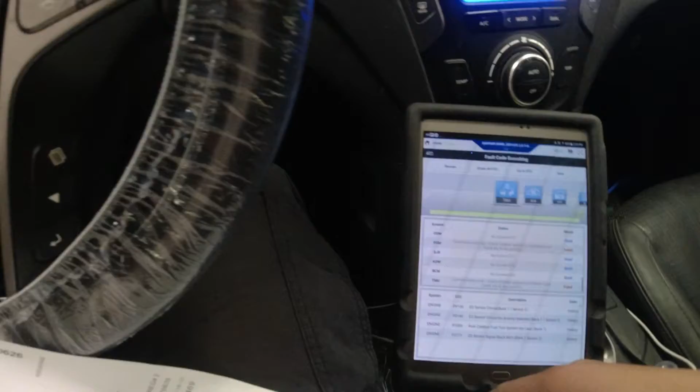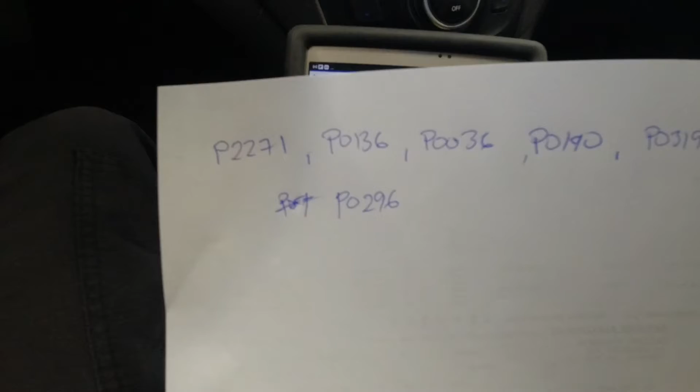So today we got a 2014 Santa Fe. It's a 2 liter, 535 kilometers. Customer complained about check engine light. The history of this vehicle, they replaced the sensor, and I jot down our codes before: P2271, P0136, and I scan it, and they're the same. We have the same code.

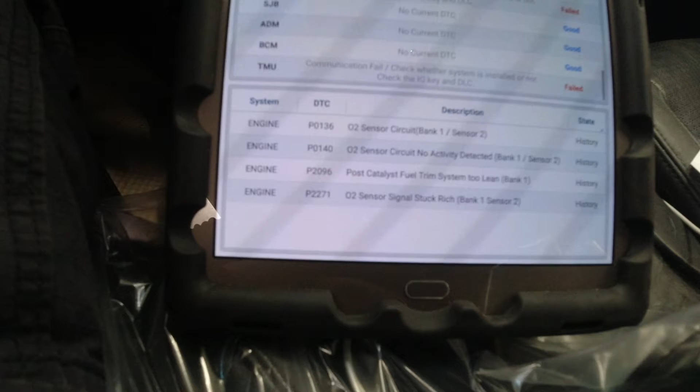So I went to the history for what part they replaced, and they replaced the bank 1 sensor 1. So I'm gonna double check if they really replaced the bank 1 sensor 1 or they replaced the bank 1 sensor 2, meaning the downstream, because as per this code right now it's pertaining to our bank 1 sensor 2, the downstream. What's the other history? Okay, that's the only history we have.

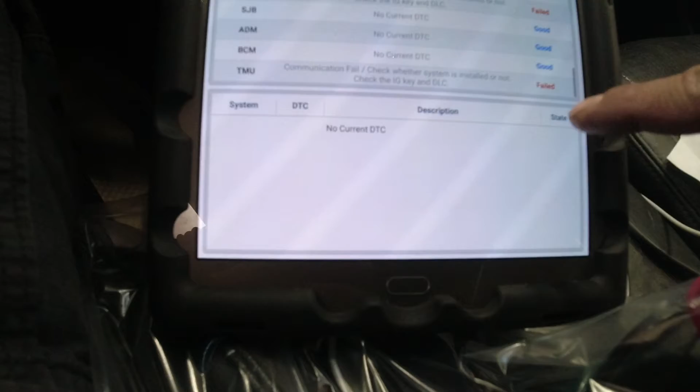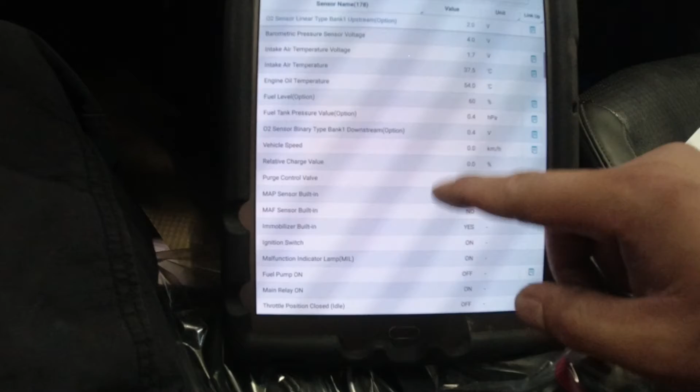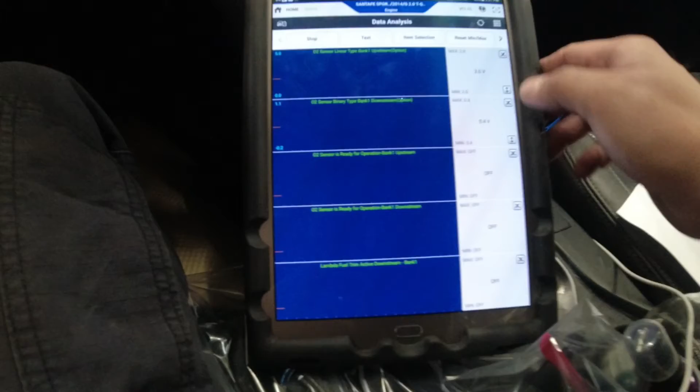So you can go to our data, and let's see what's going on with this reading, because it's saying stuck lean or stuck rich, and there's no activity on it, right? So we got here upstream, downstream. What else do we have? We'll check this O2 sensor ready for operation. Okay, so we're gonna start this. Let's go graph. So right now we're just waiting for it because the engine is cold right now.

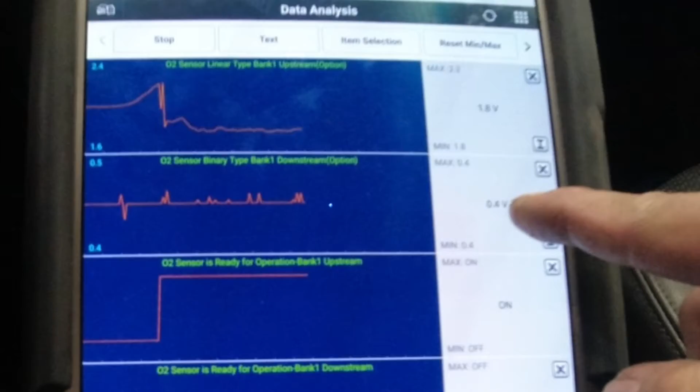Okay, so bank 1 sensor 1, the upstream, right now it's showing on. But our downstream right now is staying at 0.4 volts. So we'll just wait until we're at operating temperature, and because of those codes I can also smell the rich condition. As per the code, they're saying that it's stuck rich on the downstream sensor. So it could be injecting more fuel, because we have also a stuck lean code.

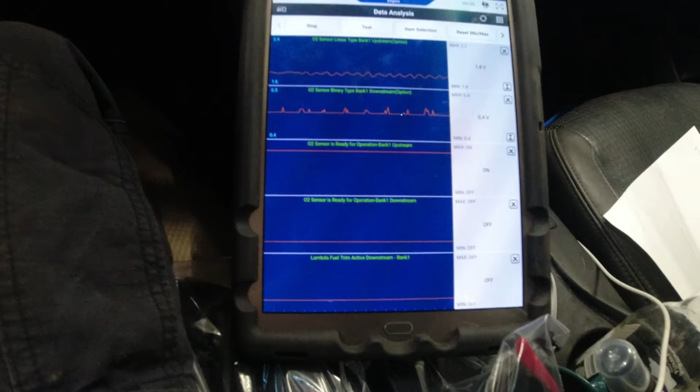So I'm just gonna let it run for now, and see if our downstream, as per the computer, wants to turn on or is ready for operation. Let's see this data here, if it's turning on or not, and then we can do some snap throttle and see the response on our O2 sensor readings. Okay, so I'm just playing around with the throttle. At least it will help the operating temperature go up. So right now we're at 87 degrees. Our downstream operation turns on, and as I can see here on our voltage reading, it's staying at 0.4, right?

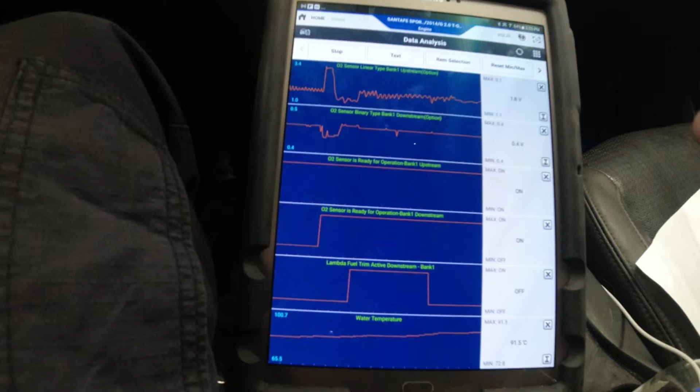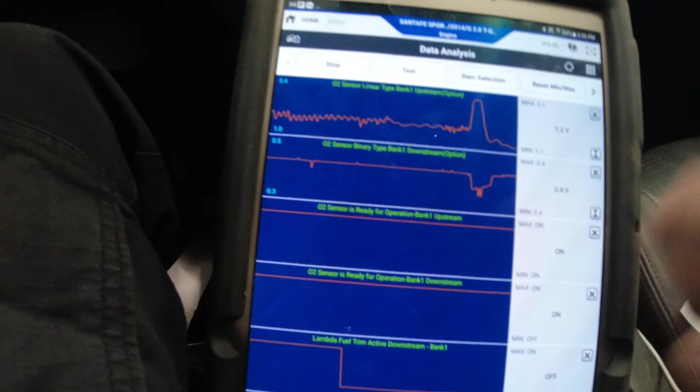So right now I'm revving the engine at least 2000 rpm, but once you let go of that pedal, those sensors should go lean, right? Because it's cutting off fuel. So right now I'm gonna raise it. Once I take off the gas pedal, as you can see here on our upstream, which is reading correctly, it goes up because there's fuel cut off. But our reading on this downstream is staying at 0.4. Maybe this is just a substitute value.

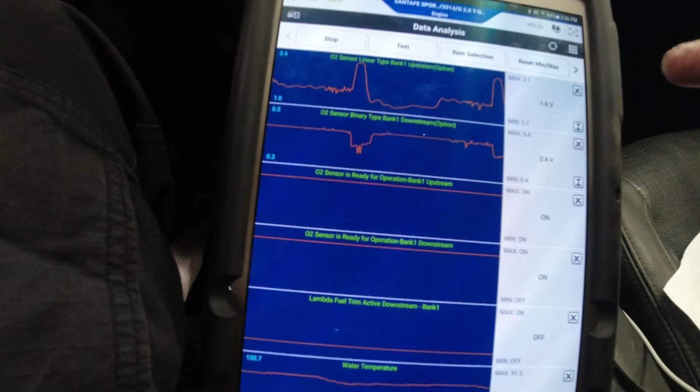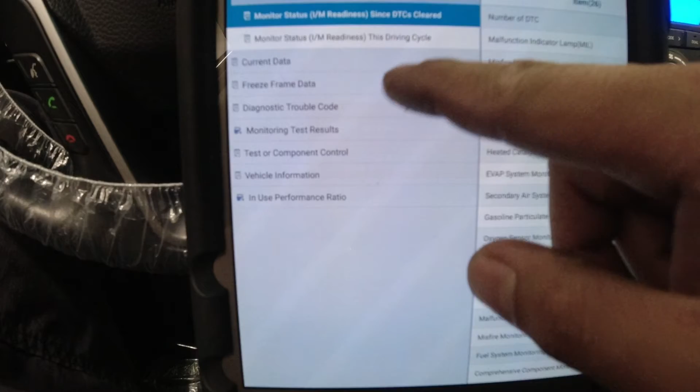So what we can do too is go to the OBD2 side, and let's see what's the reading in there. Yeah, so it's just staying at 0.4. So let's go back to the main menu. I'm gonna go to the OBD2. Okay, so I'm gonna go first to the diagnostic trouble codes. Okay, so all codes are pertaining to our bank 1 sensor 2 downstream and saying that it's lean, right? So now I can go to our current data,

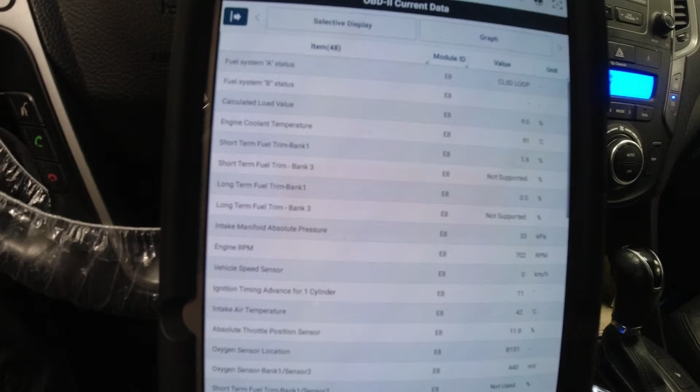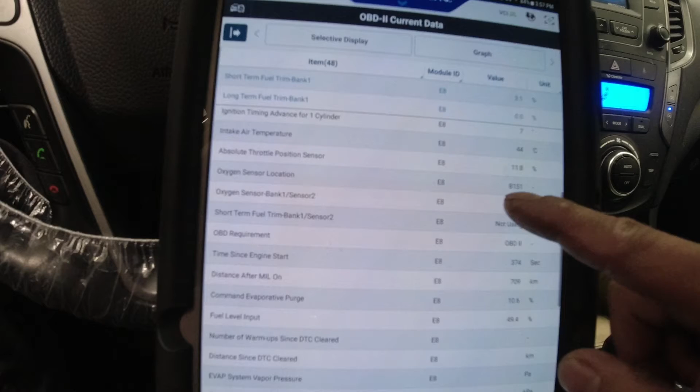because on most of these newer cars, let's say this Santa Fe, the downstream is also a fuel trim input. So let's go here. I'm just gonna check our short term, long term, our bank 1 sensor 2 downstream, and then our bank 1 sensor 1, which is the upstream. I'm just gonna graph that. Okay, so now I'm just gonna raise the RPM.

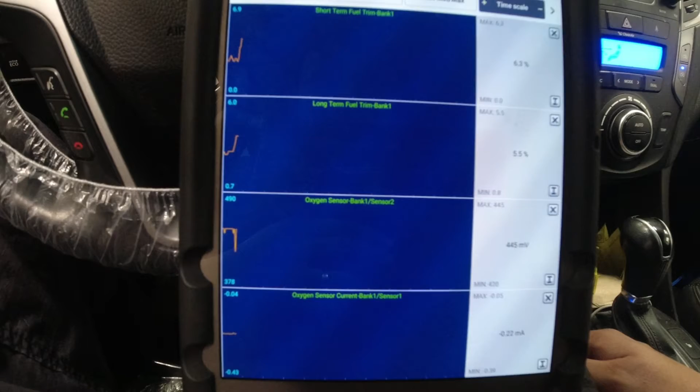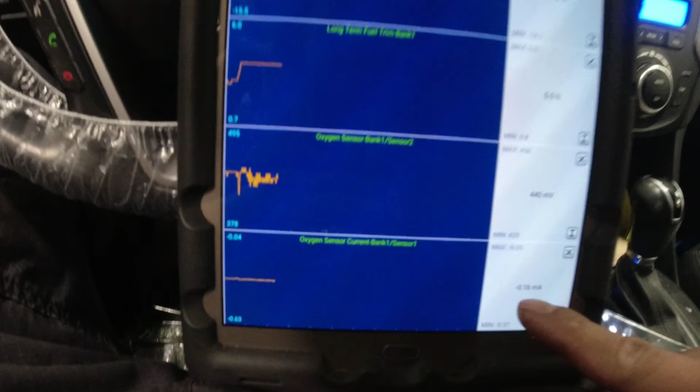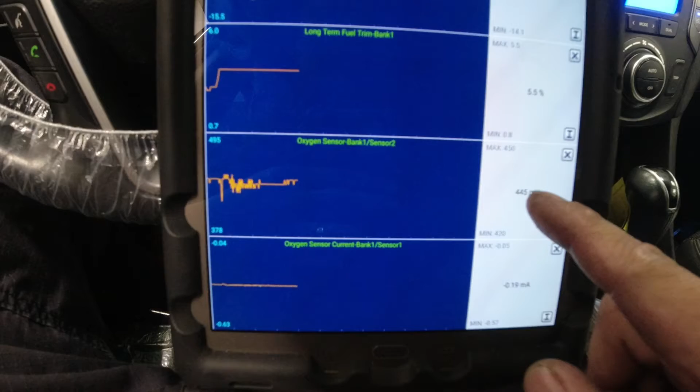So right now, when raising the RPM, my downstream should at least read 0.8, 0.7 volts, right? Or 0.9, because we're putting more fuel in there. But there's nothing at all there. It's staying at 440 millivolts. But our upstream is showing minus 0.35 milliamps. So that's the rich side of the lambda sensors, right? So if I let this go, I should expect this milliamp reading to go up and our millivolts to go down, because that's the lean side.

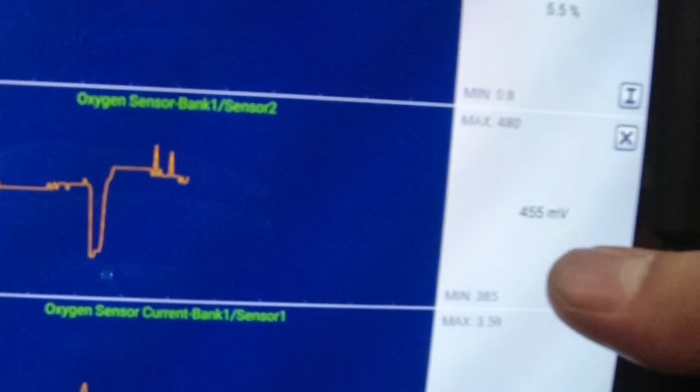So as you can see there, it went up, but it went down only 10 millivolts. As you can see here, it just went down, not all the way to zero, because that should go down all the way to zero. I'm gonna try that again. Raise the RPM. Stuck at 455 millivolts. Now if I let it go, that should go to zero. It's stuck at 380, right?

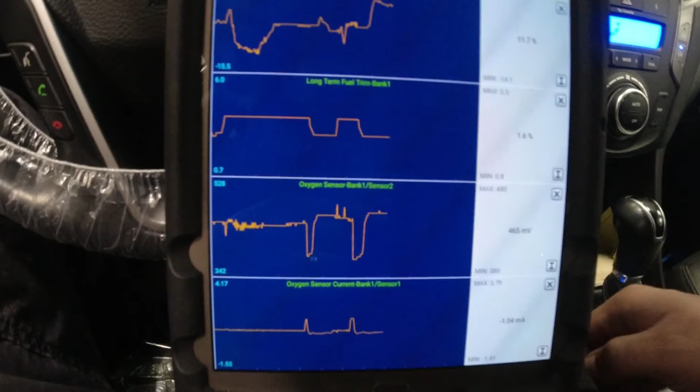So now the question here is, do we have a faulty sensor? Is our scan tool reading it correctly, right? So we're gonna go to the downstream sensor and check our circuit. I don't know if I can open the schematic diagram here. Let's see. I guess we can open it. We'll just eliminate some stuff before we go down that route. Okay, oxygen sensor, no oxygen sensor there.

There. Okay, so we have oxygen sensor here. So as you can see right now, we got our upstream oxygen sensor. We got power here, sensor 1, 15 amp, and they share the same power on our downstream. So I don't think that we have a problem with the power to cause that no activity issue on this sensor downstream, because that sensor will power up this upstream.

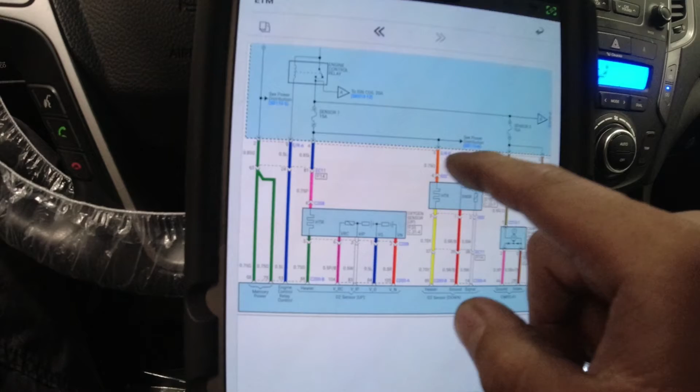But still, we're gonna double check this connector here. Maybe there's a broken wire in between here, this pin 5 and pin 4 going to our sensor itself. We'll check that, and then what else? We can check our control for the heater, if the PCM is controlling that, because if the PCM is not controlling that, let's say there's a broken wire, the heater will not work and we get a problem with our sensor not reading correctly.

So we're gonna double check those, and this is our signal, and compare, see if it's really reading that 450 millivolts, right? If our scan tool is reading correctly. So I'm gonna lift up the vehicle and let's just do visual inspection. Make sure that there's no leak also on that exhaust side, especially where the sensor sits, right? And then we're gonna hook up our test leads and then we'll monitor the readings.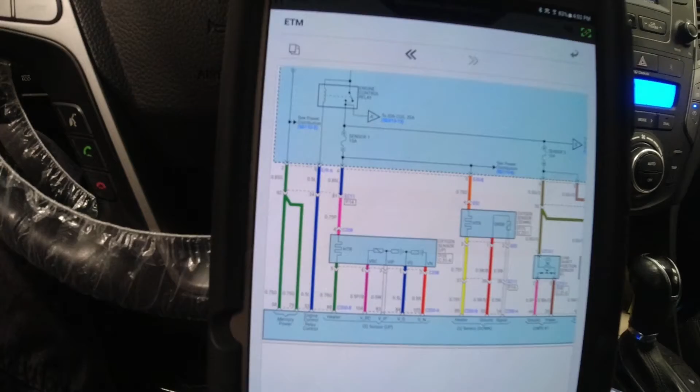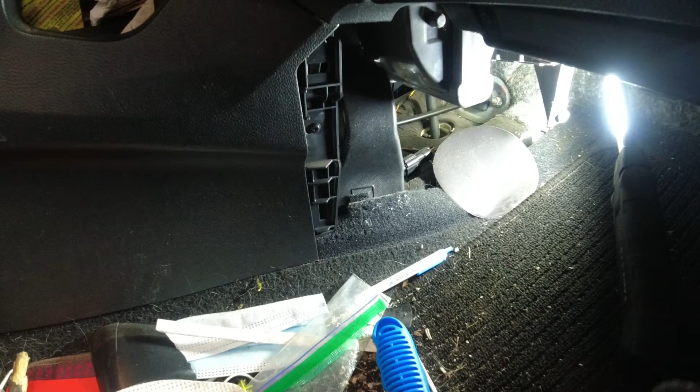Okay, so as you can see, there's some garbage there. Oh my goodness. I think the connector location is in here. So we're just gonna pull that out. Just trim piece. We put the light in. Okay, so our connector that we need to do some testing is this guy here. So let me remove that clip there so that I can just pull that whole connector there.

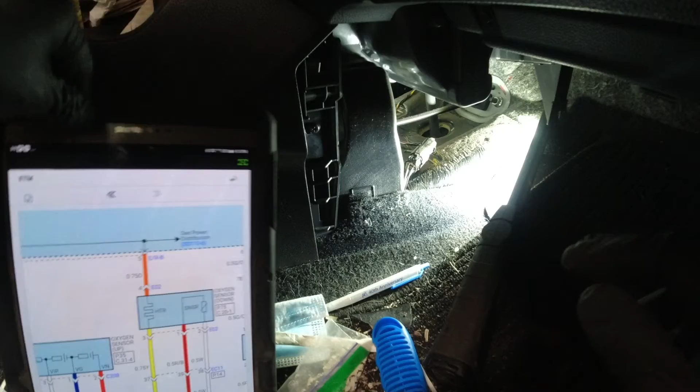Okay, so where's my scan tool? Let's confirm our wire colors. So here in my wiring diagram, as you can see there, there's orange, that's our power feed, our ground control for that heater, yellow, red, black, and white. So on this side here, I can see that we got orange, yellow, red, black, and white, right? So first we're gonna do the test and make sure that there's power going in.

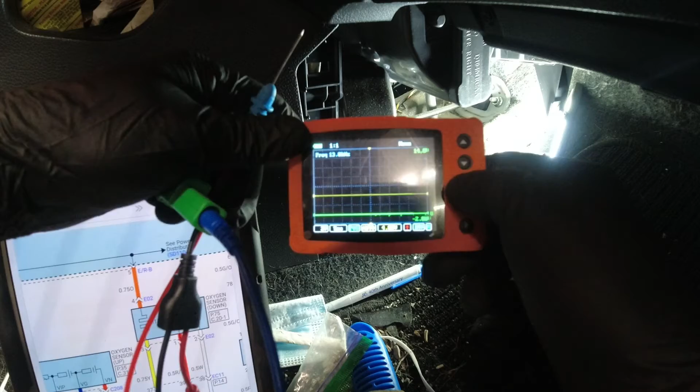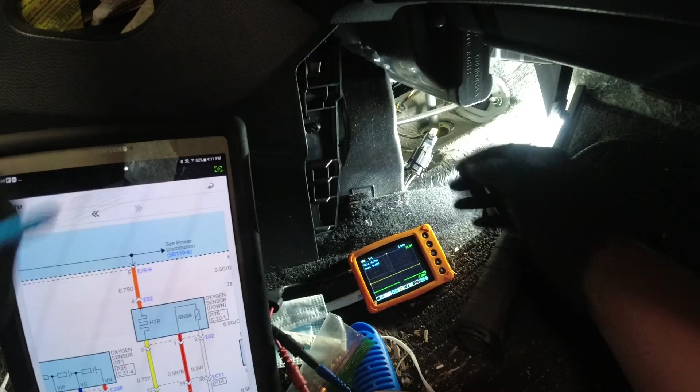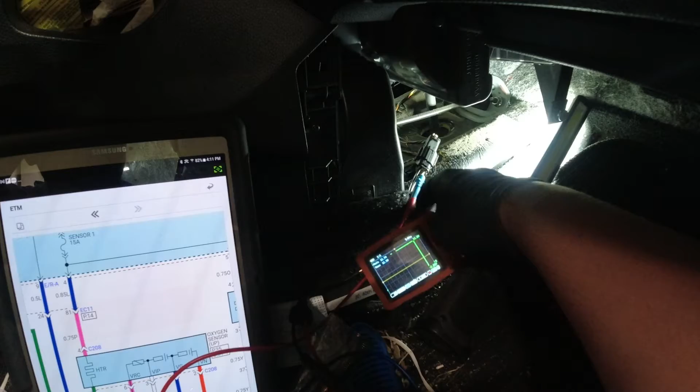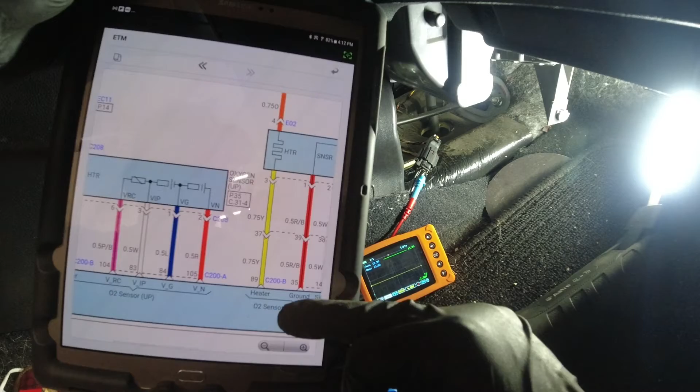Now, just to confirm with the heater side, if I'm gonna move our lead to our yellow one, ignition on, I should still see 12 volts, right? Until the computer grounds it, that's the time we get that ground control. But from here, fuse 12 volts, and it should pass 12 volts, right? At least we can see if we have an open circuit on our heater.

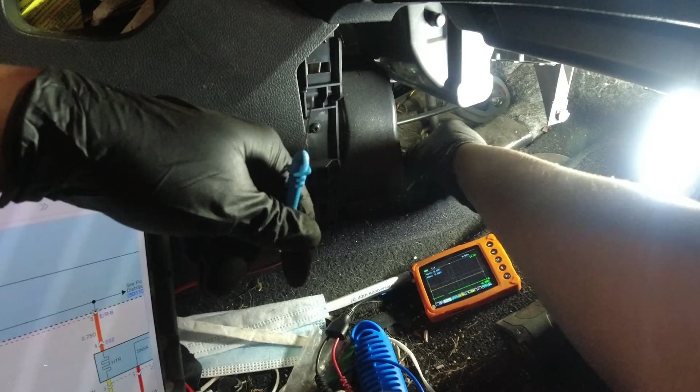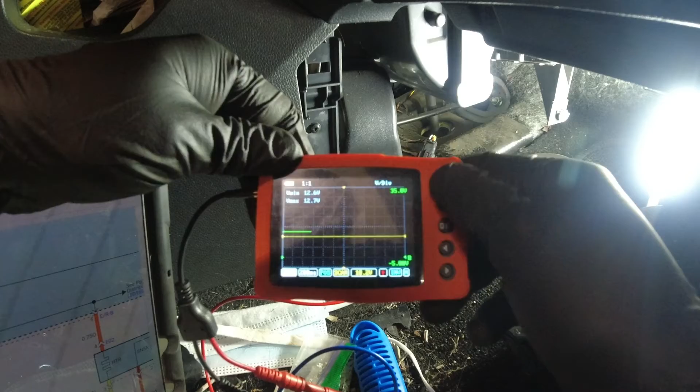So that's gonna be yellow. I'm gonna just take out that lead, and then that's the other side of the wire, the white one. Okay, so in there I still have 12 volts, right? You can see my line there, it went up. Yeah, 12 volts. Okay, so now next is, do we have a ground control? Does the PCM have the ability to make that heater circuit work? So I'm gonna leave that pin there.

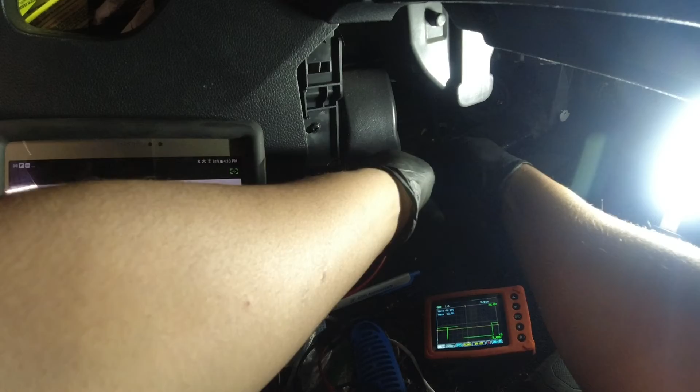Okay, now once I start the car, this signal will go down and it's gonna make that waveform like a signal ground, right? So let me start the vehicle first.

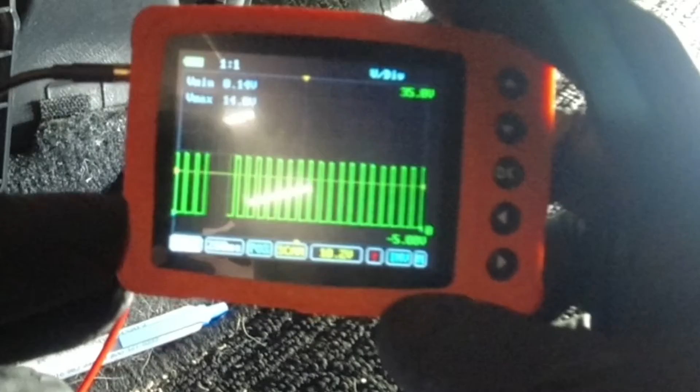Okay, so as you can see there, our PCM has that ability to ground that circuit, right? I can see it's pulling to the ground until the time that it's warmed up. That's the time it doesn't want to do it, to turn it off. But it's always there to maintain that temperature so that the O2 sensor will read accurately, right? So next we're gonna go to our signal.

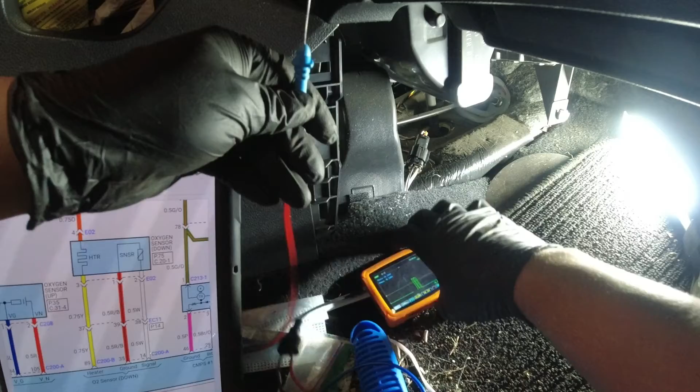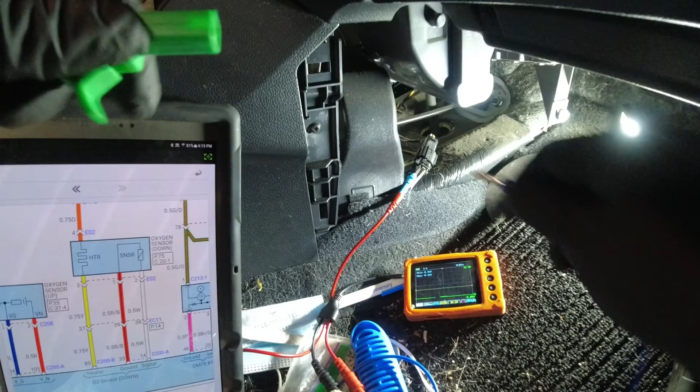The white one, and let's see if we have the same voltage there, 400 millivolts. That's what the scan tool said. White one, that's on the top. Okay, so on the top, I think I have to use a sensor ground on this one. So, sensor ground. Okay, let me adjust this guy here.

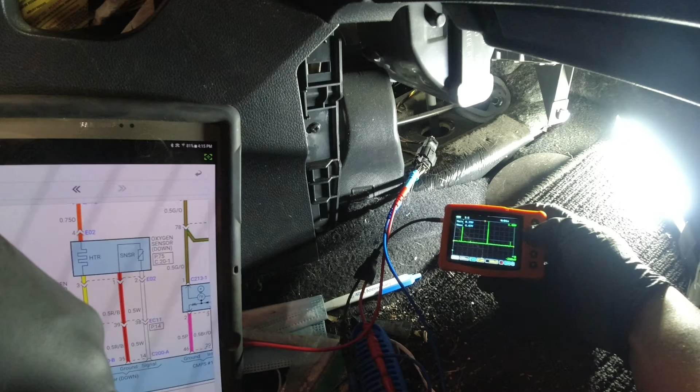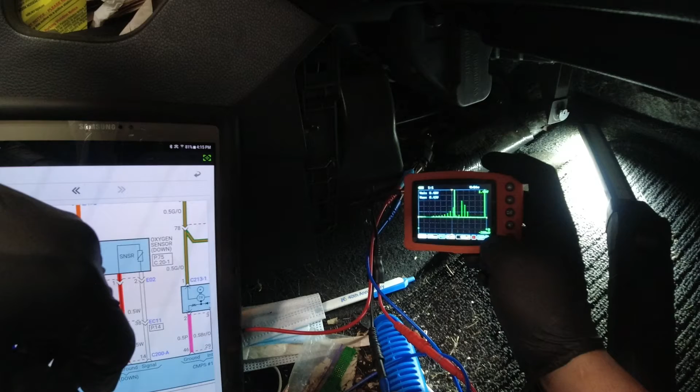Okay, so as per this reading, is it my connection? Why is it moving around? So right now there's some spike there, right? But the minimum reading there is 0.39 volts and the maximum is 4.4 volts, is that good? Let me do some snap throttle and see if that's gonna change.

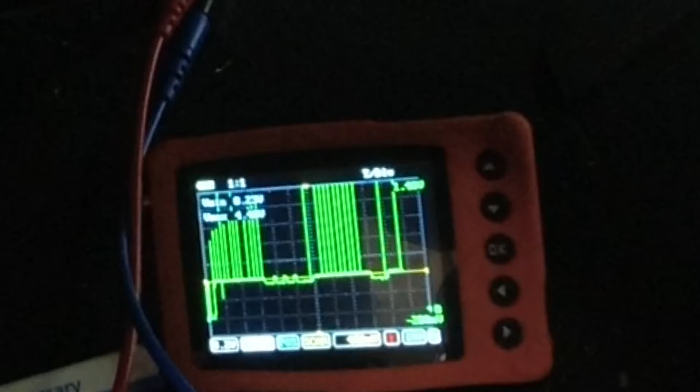Okay, it doesn't do anything at all. It's just a spike there, but this guy here, once we were doing something. So let me just raise the RPM and see. That should go lean. Little gas and that should go lean. And that small one down there, where's that guy? Oh.

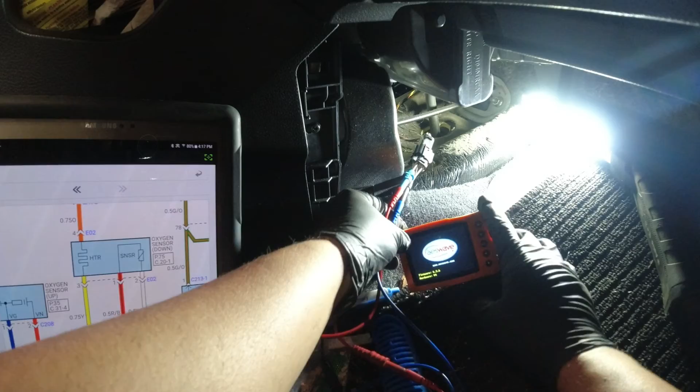There's no reading there now. Okay. Why is there no more reading there? Did I do something wrong? I just reset that quick. Meter. Voltage max.

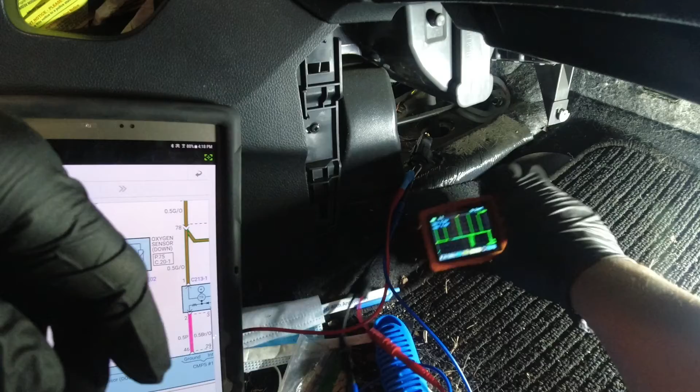Okay, so right now I think the scope is seeing something here. This is my measurement here. That line is reading 430 millivolts, right? The same thing as our scan tool, but since our scope is very fast in reading, that's why it's reading that spike and going down. But at least if I do some snap throttle, we should have some activity there.

You can see there it just dropped, and now it dropped all the way down. It dropped again all the way down. Can we see that it's stuck lean? It looks like it's stuck lean now. So if I move this cursor, let's measure that reading there. That side is 56 millivolts, so almost zero. So that's why we have a code for stuck lean, right?

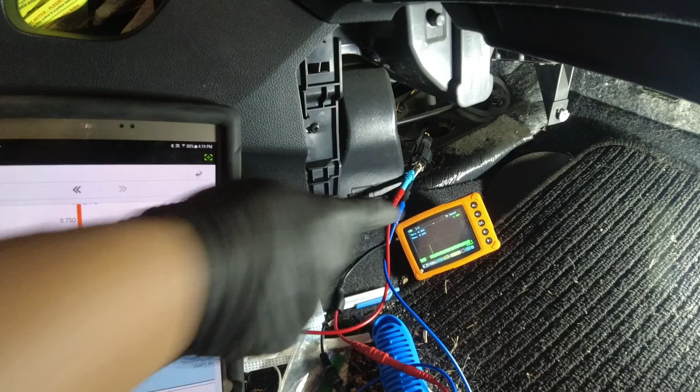Sometimes stuck rich, but right now it should not be reading like that if the sensor is working, because we're at idle, right? And during our visual inspection we could not find any leaks. So okay, right now I can say that we have a faulty sensor. Now I'm just gonna go back to our heater side, the yellow one. I'm just gonna make sure that we still have control there.

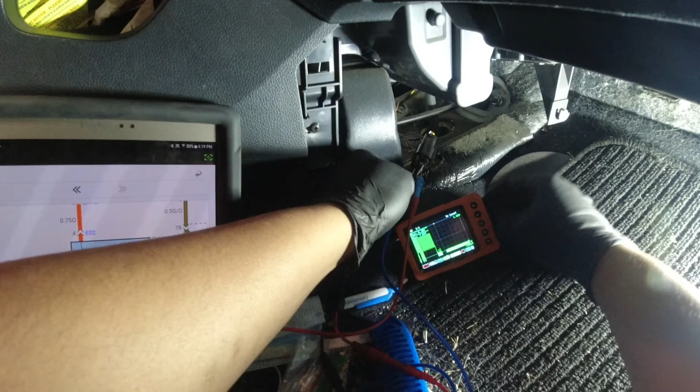Yeah, so we still have control, because I don't want a problem because of the control, or it's not controlling that heater circuit, right? So at least we checked here that we got good control, good power going in, but our sensor is just reading stuck lean, right? As we can see on the scope, it's reading 0.

And we just did this to verify that our scan tool really didn't give us wrong numbers, because sometimes the scan tool is not correct, because it's processed data. In here we're testing the sensor itself, how it gives us the reading. So I'm gonna go back here. Let's see what's the reading still. Yeah, still reading that.

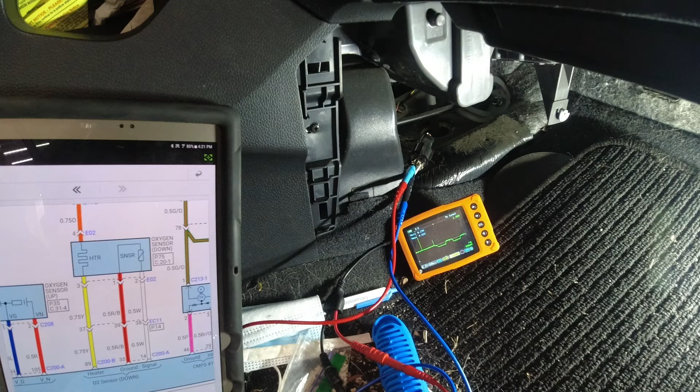Okay, so it went back to 400 millivolts, but during those times it went lean, right? So 440 millivolts. Yeah, so we got a sensor problem. So I guess we're gonna call this that we're gonna put a new sensor. Let's verify our repair, make sure of that voltage reading when we double check our repair.

Once I put the new sensor, it should be reading from a maximum of at least 0.9 to a minimum of at least 0.1, or 100 millivolts to 900 millivolts, for our downstream. So let's see if it's a go ahead with the repair, because they already put a new sensor but it's in the upstream. If not, I guess this is the end. At least I showed you guys how to check that sensor and how to verify our wiring integrity. So I hope you enjoyed that video.

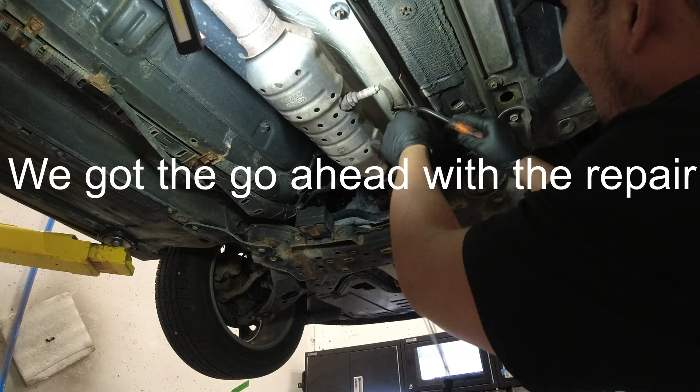Alright guys, so I went ahead and removed our connections inside, as you can see there. Alright, now I'm just going to remove this clip here. Okay, so I'm just gonna hit this sensor. Wait.

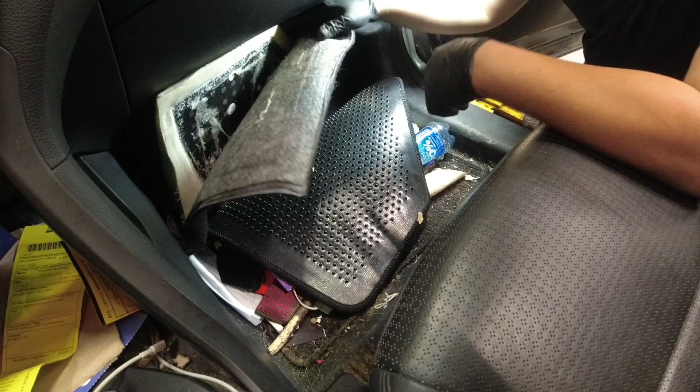Okay, so I'm just gonna lower the vehicle and go inside the car. And then I'm gonna show you where that harness is located. It's under the carpet on the passenger front area. And that should be it. Okay, as you can see, it's under here, our harness. So make sure that you push it in first before you install that. And then we're just gonna plug this in.

I know you will not see anything because I'm putting the camera in the best position that there's no garbage. So I'm just gonna clip that in. Put our connector there. Yeah, that should be enough. Just push the carpet, push the garbage, and then just put your side panel filters.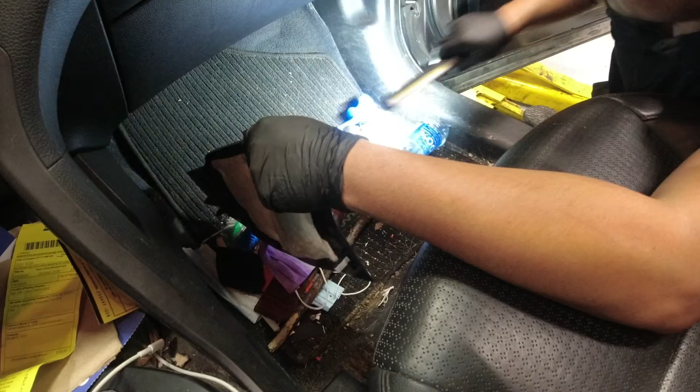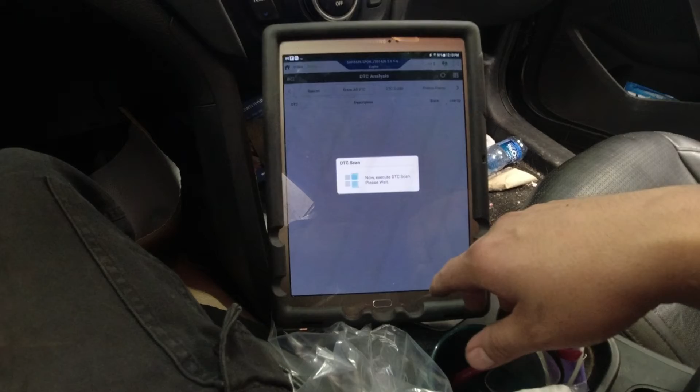There you go. So now we're gonna go to our scan tool and let's verify our repair. Okay, so I'm just gonna clear the previous code because I didn't clear that last time. We go to DTC. Go to our history, erase. Okay, now we're gonna go to our data, and then we'll just grab those four datas.

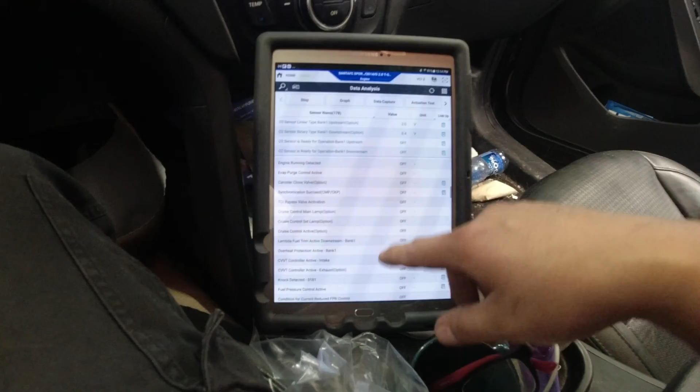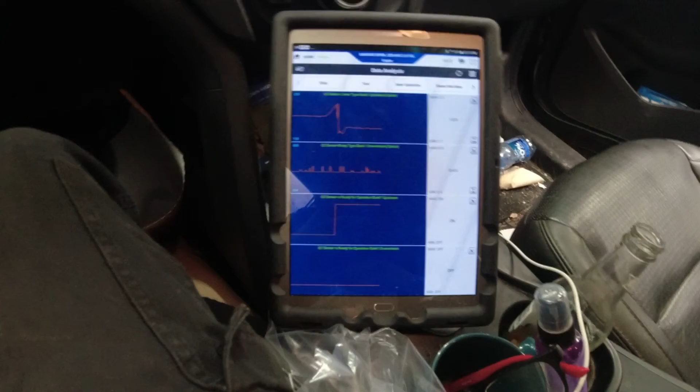So we got our upstream, our concern downstream, and then the operation on and off. Put the graph, and then we're gonna start the vehicle now. So these models, especially replacing emission related components, usually it will take at least 2 driving cycles. So I'm just gonna warm up this vehicle, and then let's see if our downstream O2 sensor will read correctly now.

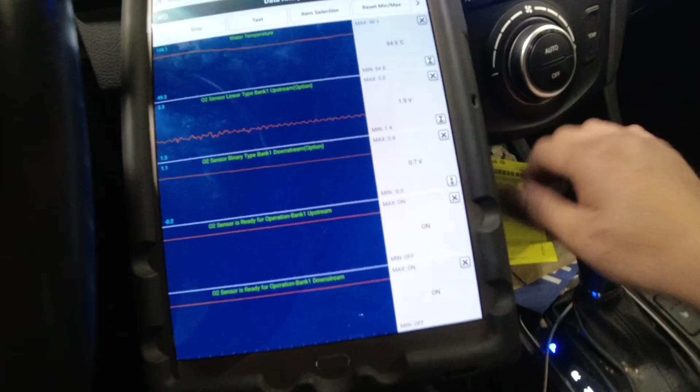Alright guys, so after warm up, as you can see our water temperature is 90 degrees Celsius. Our upstream is reading correctly, like what we tested before, and now our downstream is reading at 0.7, as you can see there, right? So we're just gonna check our sensor if it's going to at least 0.1, not 1 millivolt, 100 millivolts. At least we're checking the range of the sensor, right? So I'm just gonna raise the RPM at least 2 or 3,000 RPM.

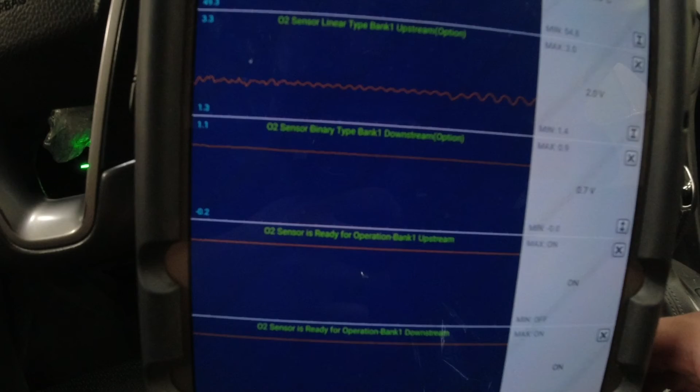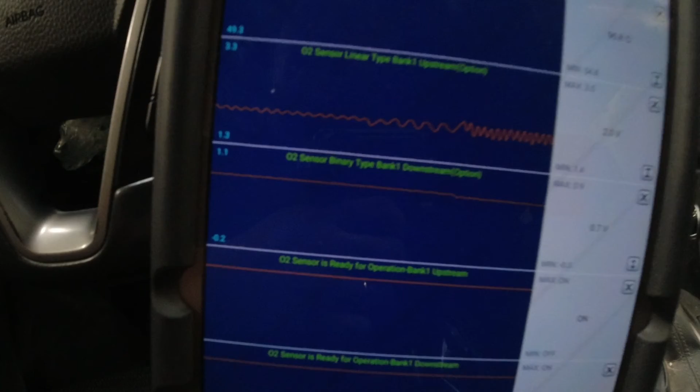So as you can see on our downstream, it's reading steady, which is good, because if it's not reading steady, like mimicking the upstream, you could have a problem with your catalytic converter, right? So once after I raise the RPM, if I let go of gas, our downstream should go lean because it's fuel cut mode, and our upstream should go lean too, meaning it's going up because the upstream is reading reverse compared to our downstream, right?

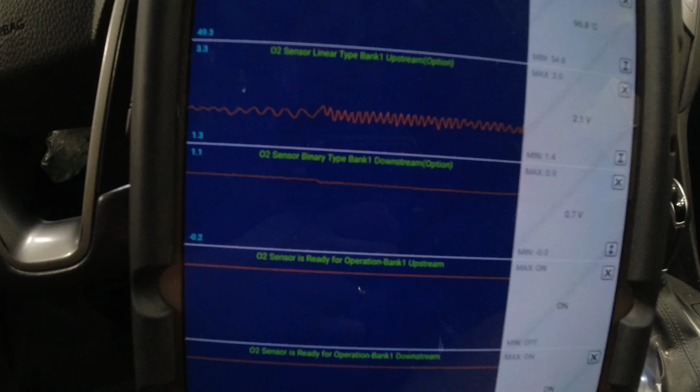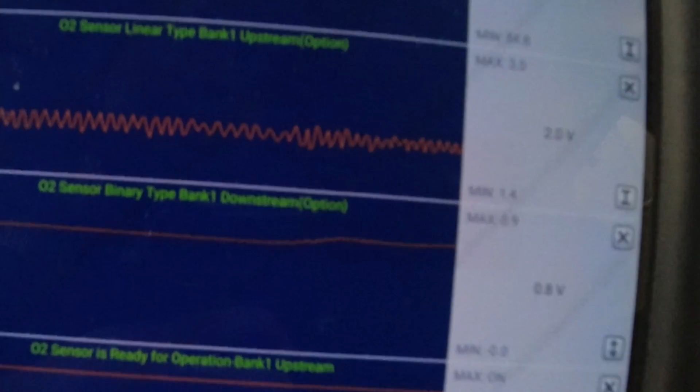So unlike before, even though we raise our RPM and release our pedal, right now I'm putting more RPM there. It was reading 0.8. Before, the reading was just staying at 0.4, maybe 0.3, but it's just staying in there, right? So I'm gonna let go of gas now. So as you can see there, our voltage drop on our downstream staying at 0.1, which is good, and that should recover and go to its normal reading of 0.8 and 0.9.

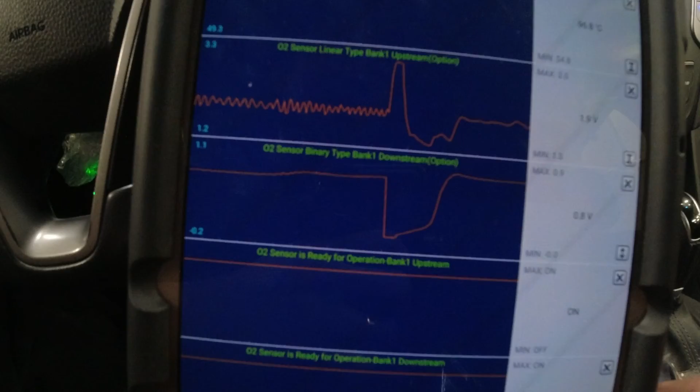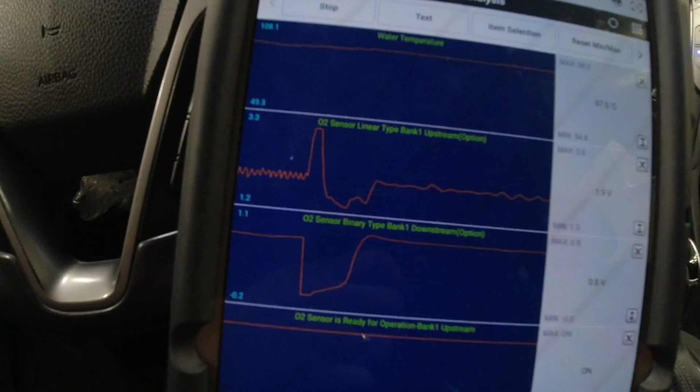So at least now we know the range of that new sensor is reading correctly, because sometimes a new sensor doesn't mean that it's good, right? So make sure every time you replace something, check the operation of it. At least you verify the repair and you're confident in your repair too, right? So I'm just gonna go for a quick drive on this vehicle, make sure everything is good, I don't hear any abnormal noise, so that I will not get a comeback, even though I'm not repairing other noises, but just to make sure, right?

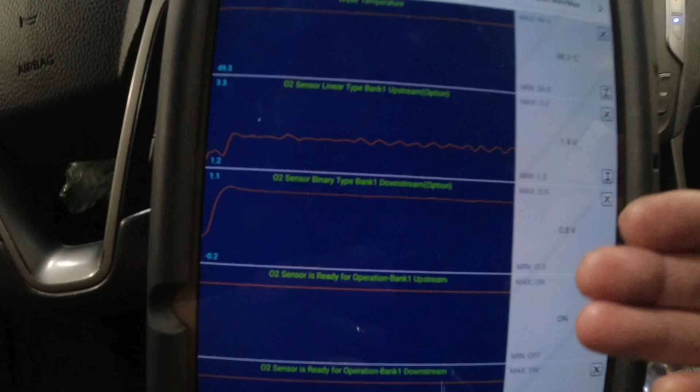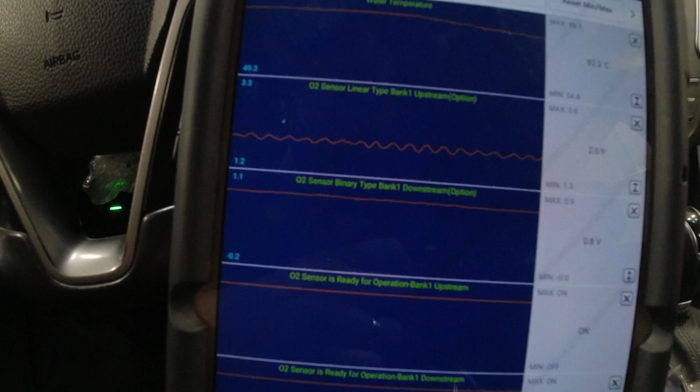And also, I told you guys earlier about the components in the emission system, that it takes at least 2 driving cycles. But as the reading is right now, I'm confident, I'm happy with how our downstream operates. So I'm just gonna tell the customer to monitor it, right? And that's about it. So I hope you guys enjoy this diagnosis on the downstream O2 sensor. You can do this in any car as long as you get a good scan tool that can read the datas, and maybe a multimeter or a scope, so that you can also check the sensor itself, whether our scan tool is not lying on the reading, right?